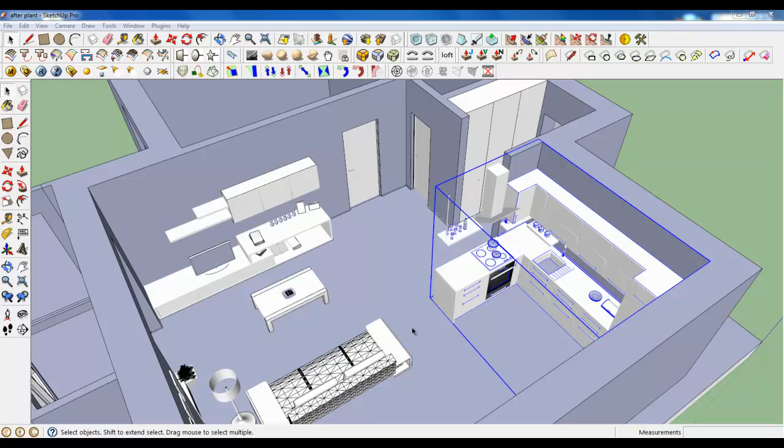Here we are again, and it's time to model furniture and accessories in the dining room zone. But before that, I've made some copies of pictures on the wall, also placed them on the unit and rotated it.

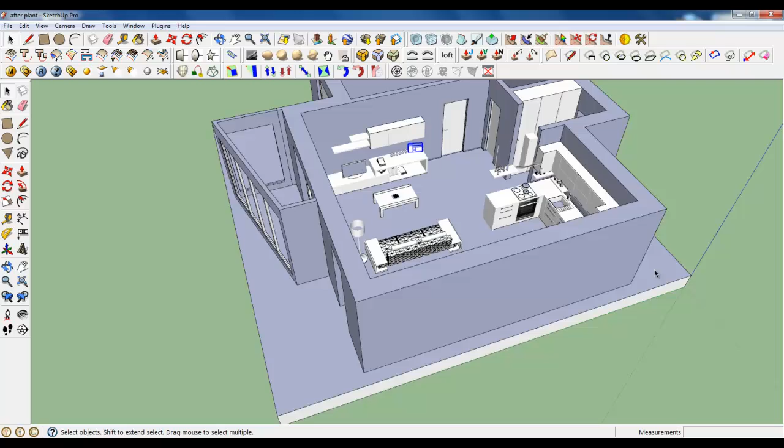Now let's hide the kitchen zone. Also, you can hide the sofa, for example. And I will start with chairs and the table.

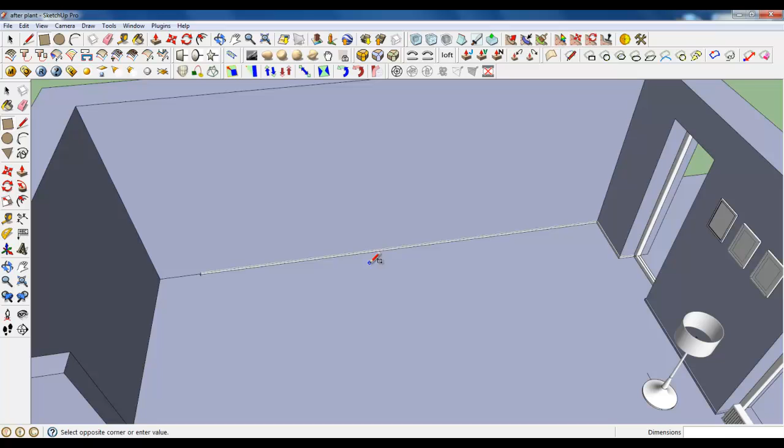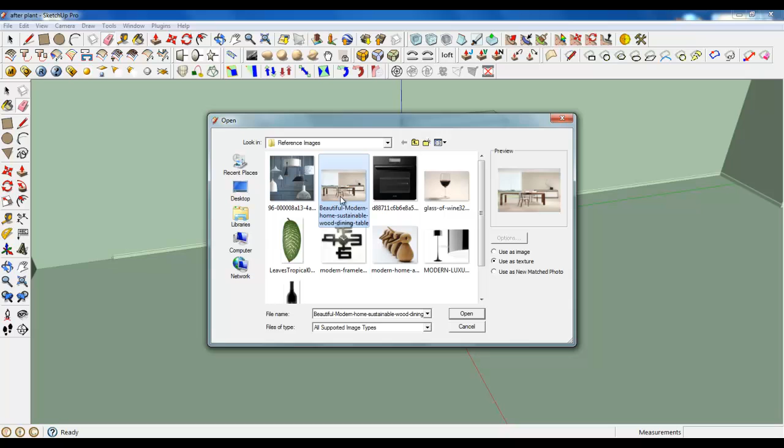I have a reference image for the chair, so let's make a simple plane. Now we can import a picture, reference images, and this image. Let's upload it and make a position.

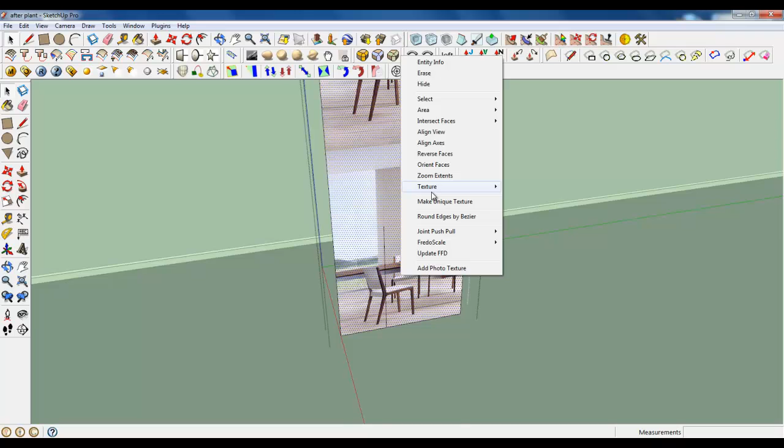Now we need our chair to be 450, so let's draw a line, 450, and scale our picture.

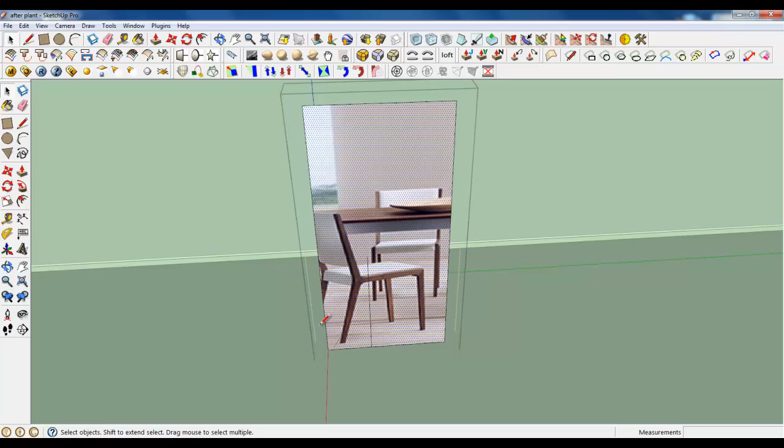It's not good enough. It's something about, but we will scale it after we are done with the base. Okay, so let's draw some lines. The perspective is not perfect in this image, but we will fix it.

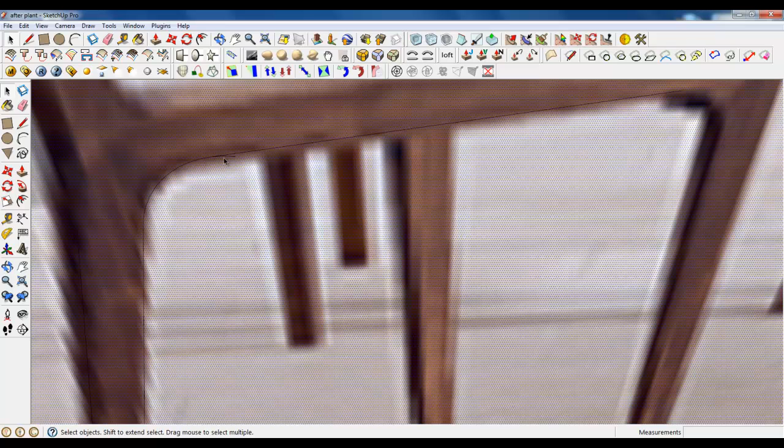Well, draw some lines. It's easy. We need to connect them only. Make sure the height is not different.

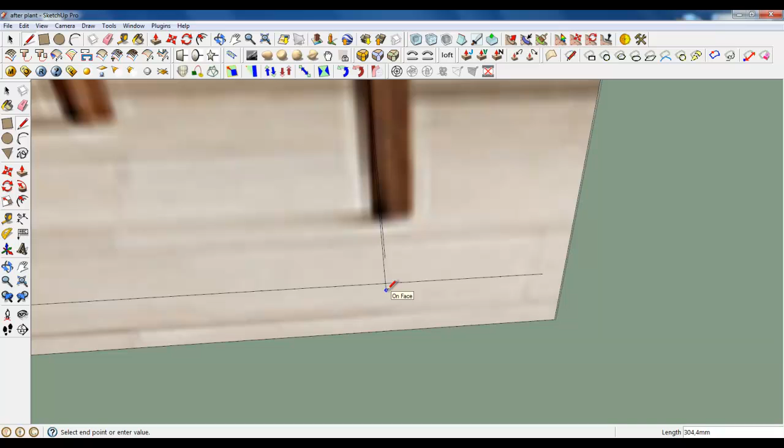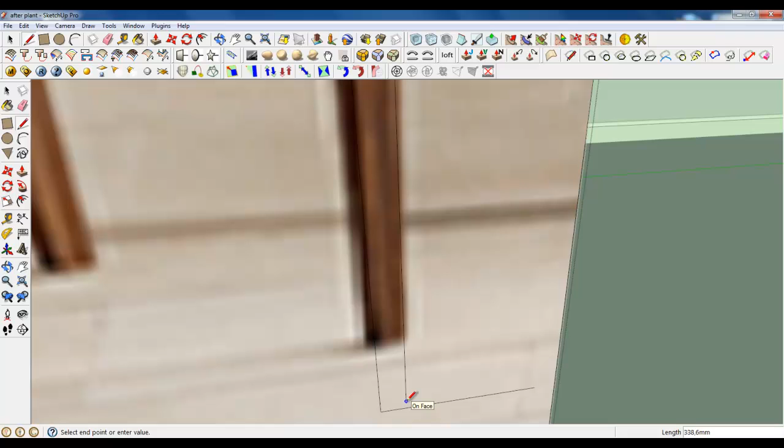Continue line. Well, it's not good now. Continue line and delete these faces. Okay, very good, we are doing it well. Maybe it takes some time, but time is needed. Okay.

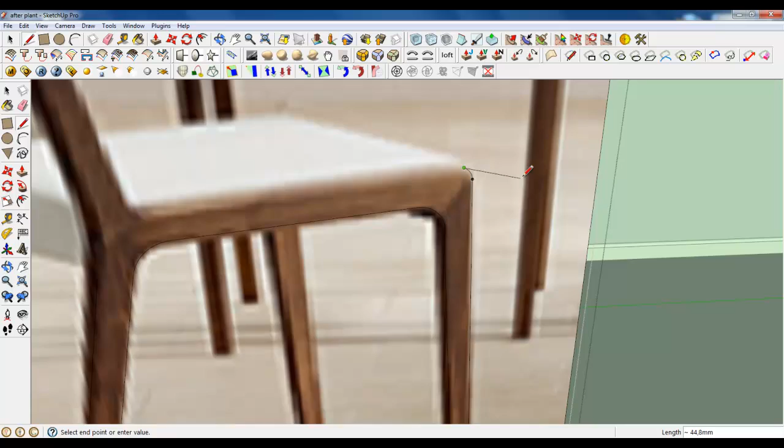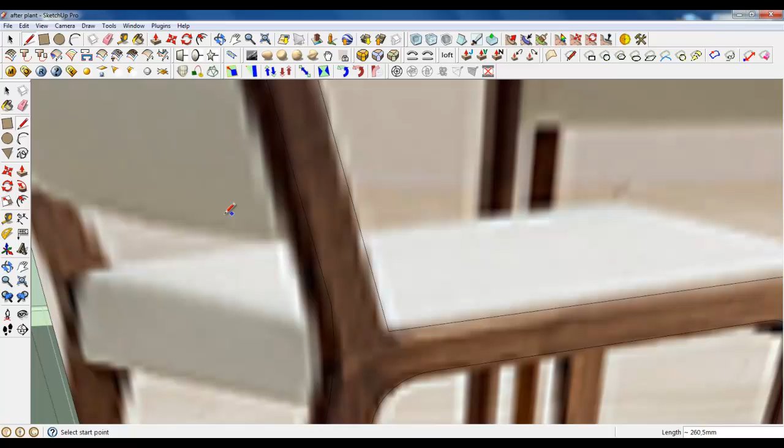Draw an arc. Make sure the arc is on the plane. Make a smaller one. One more line and one more arc. And continue the lines. It's good now, we have a separate plane.

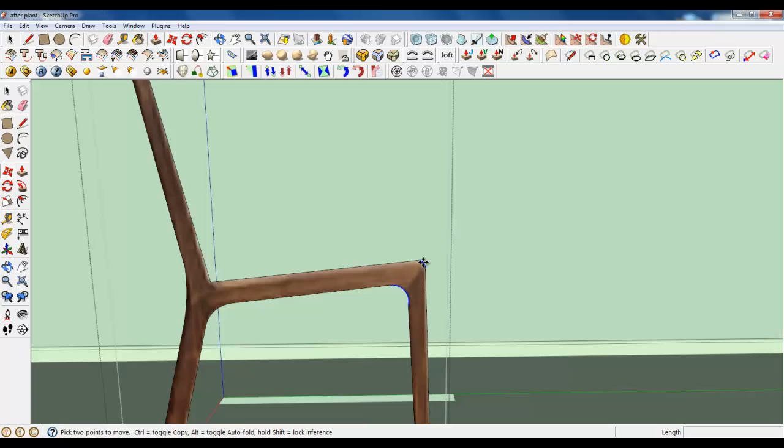So delete these lines, and now you see that the picture is not good, so grab this arc and this, and make them look like this. Close the group,

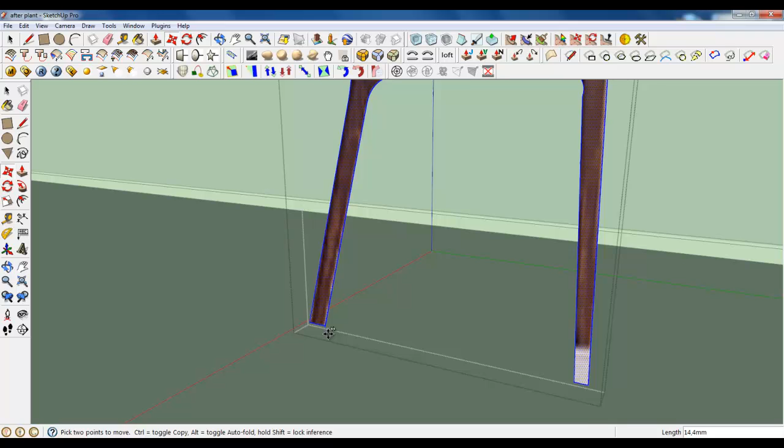Place it on the floor. If it doesn't, open and place it on the floor. All the legs should be in the same position on the floor.

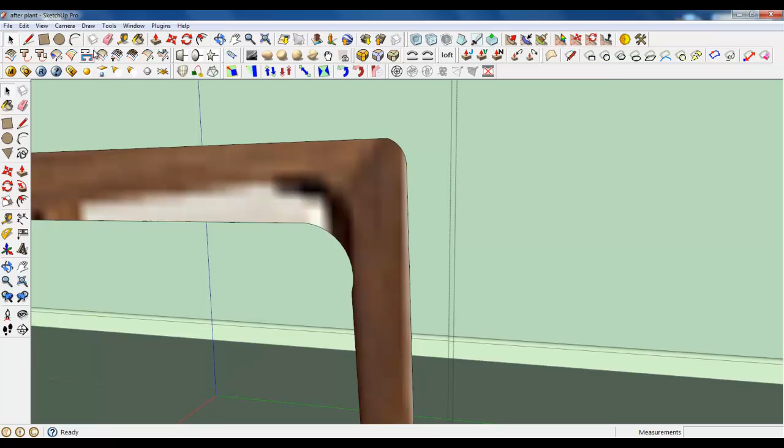Okay, so let's fix this arc. It will be easy. Yep, very good. And now extrude.

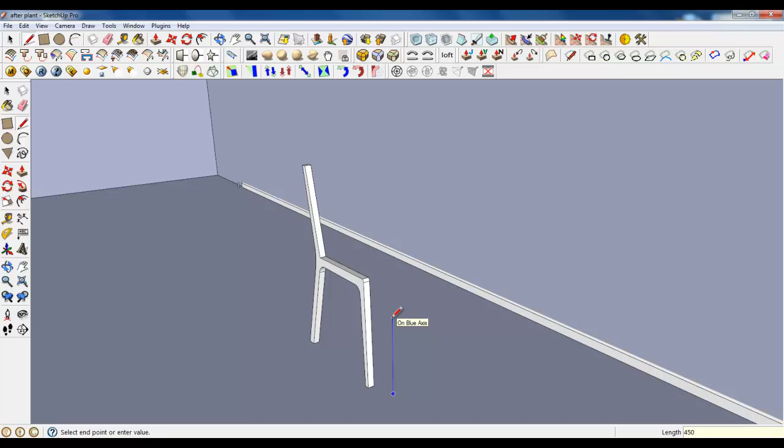Tell Sketchup 20 millimeters. And now draw another line and type in 450, to enlarge our chair. It's good now.

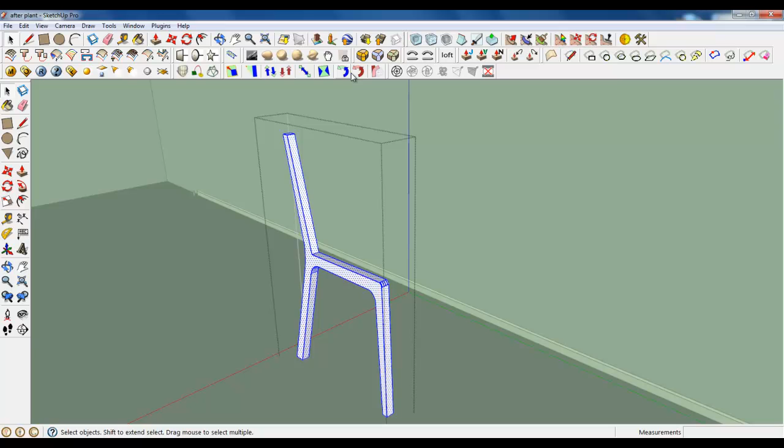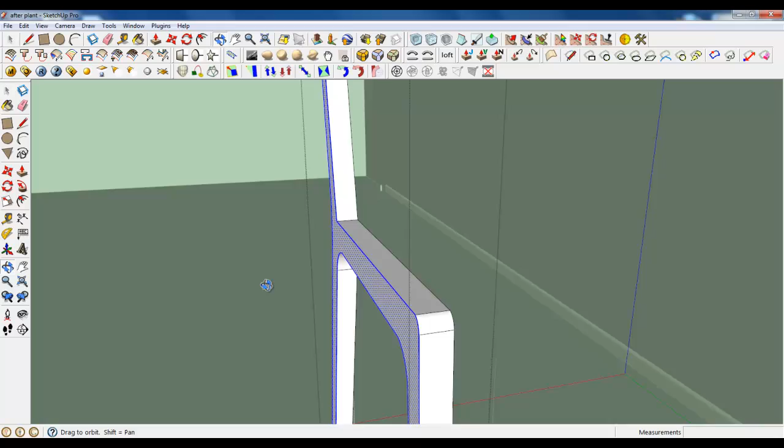Let's select everything and round all the corners. It will take a while, so add only 1 millimeter and 3 segments. Well, maybe let's select this side and this. It's good now, and press calculate. You see it's 709 edges.

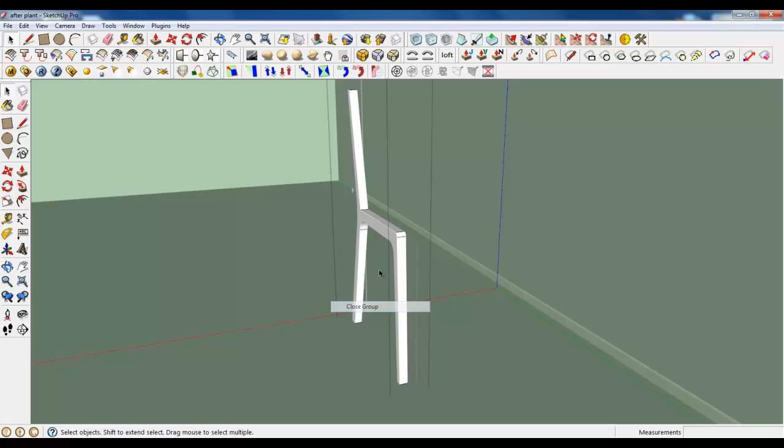I will wait, and then we will copy this leg. Yes, it's good. Now let's copy and set to 400. Very good.

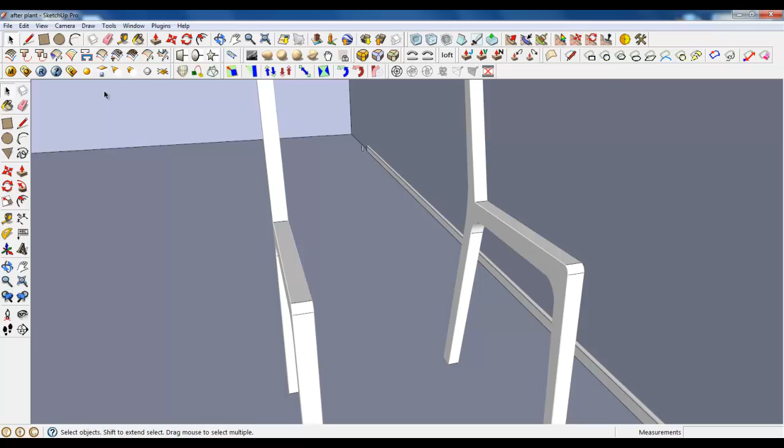Now we need a place to sit, so let's create a, firstly let's make it a component, and call it, chair, and open it. Now create a simple rectangle.

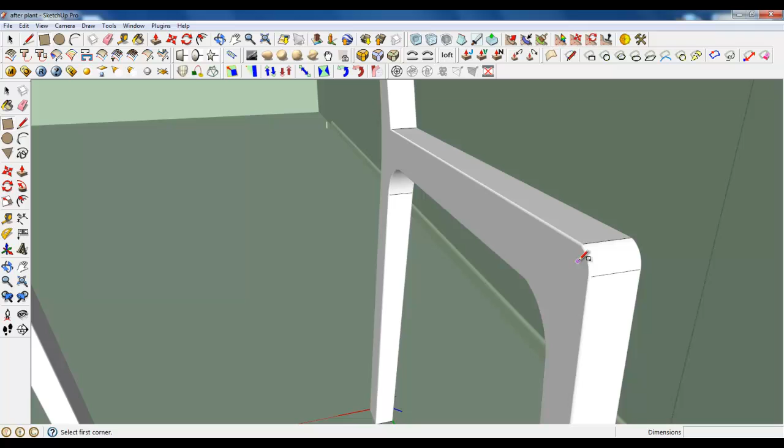We are going to extrude it. Maybe let's adjust. Good, and extrude.

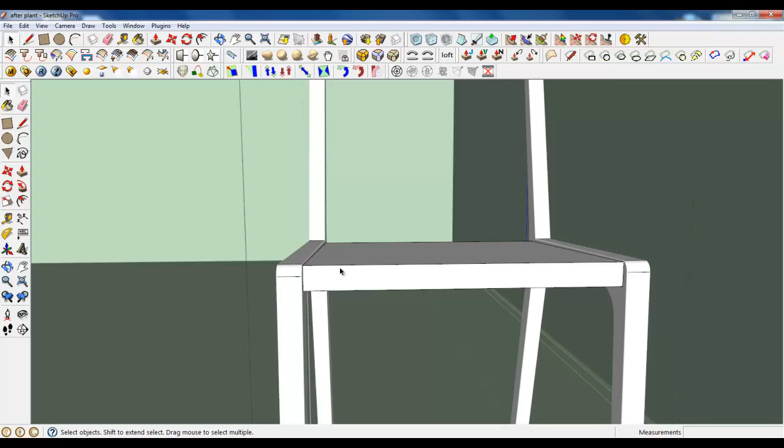Let's cut it with a rectangle tool, drawing rectangles, simple rectangles. Well, it's not good, so

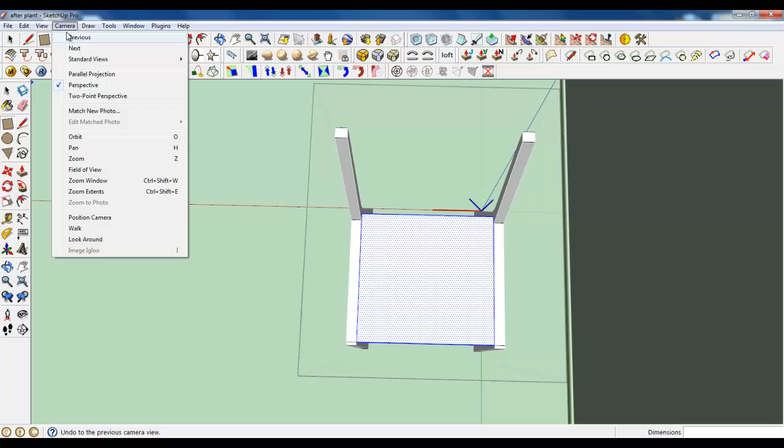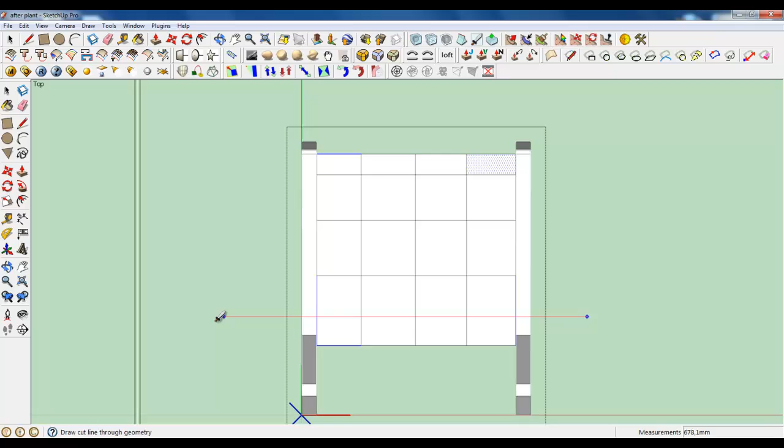Go to the parallel projection mode and top, using knife we can cut this plane, because we are going to use a subdivide tool, subdivide and smooth. It's good now.

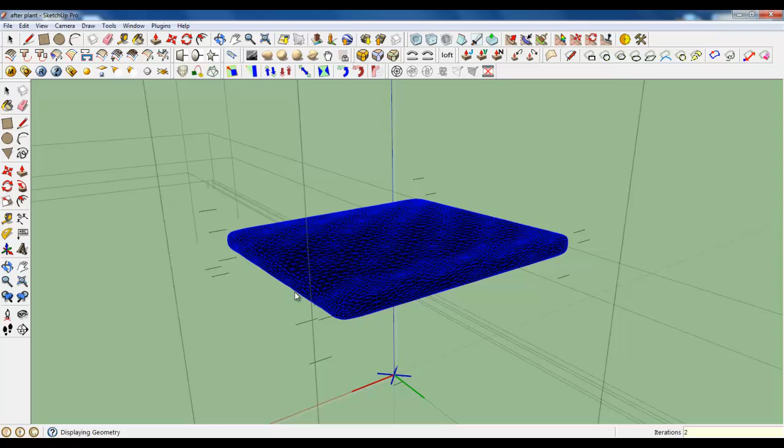Go back to the perspective view, select everything, subdivide and smooth. Type in 2 iterations, press enter. The geometry is being displayed and it's finished.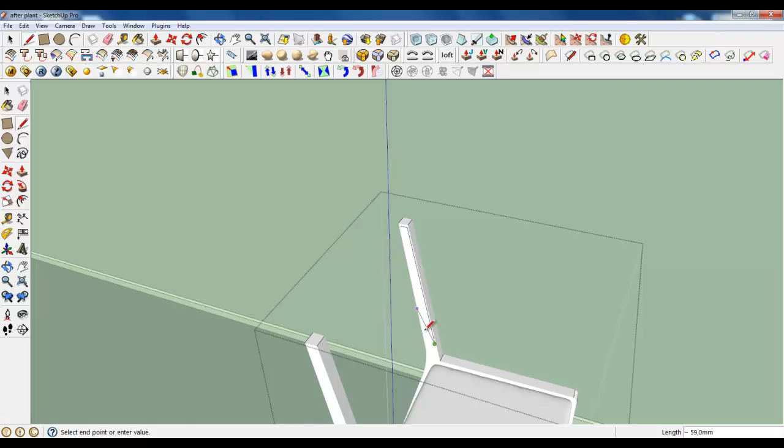We can go to the back one. Create a rectangle with the line tool. Maybe it's not a rectangle, it's a figure.

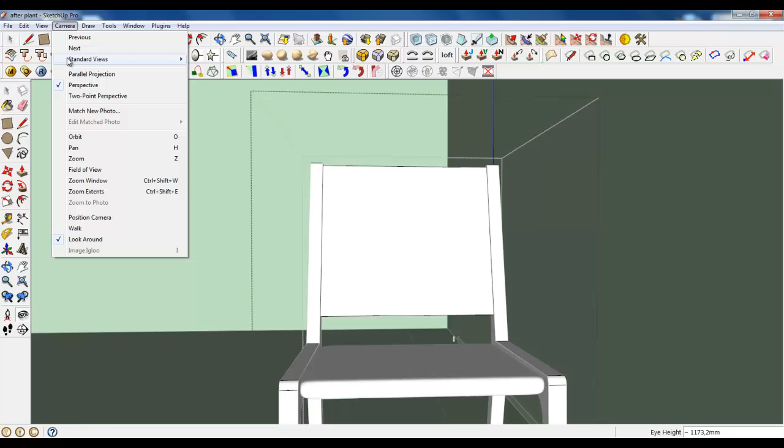Let's extrude and go to the perspective view. Not perspective, turn off perspective and go to this view, and also make some cuts.

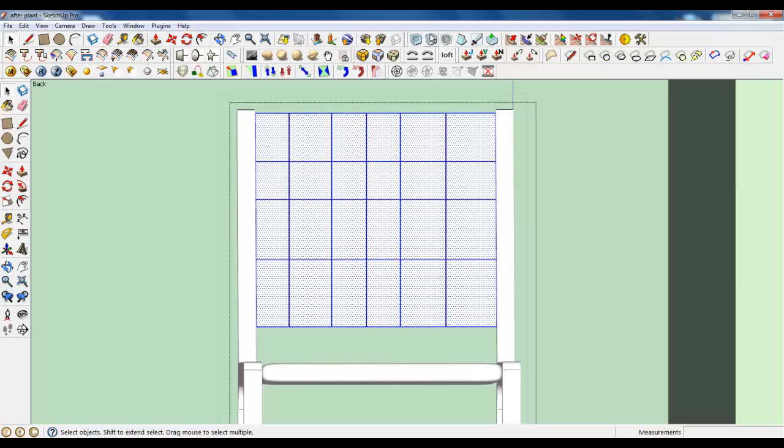It's enough. Select everything, subdivide, and also subdivide and smooth. Type in 2 and enter. Enter again. The geometry is being displayed also again, and we have already made a chair.

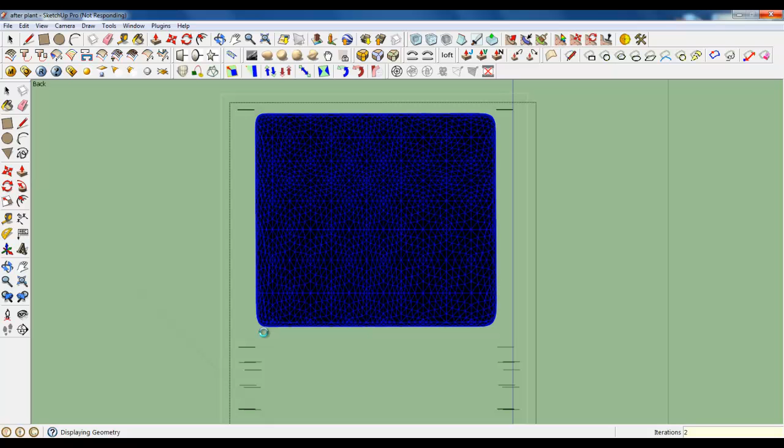We will have to copy maybe 4 of them, and now we will make a table. Yes, the chair is done. Back to the perspective view, and let's create a table.

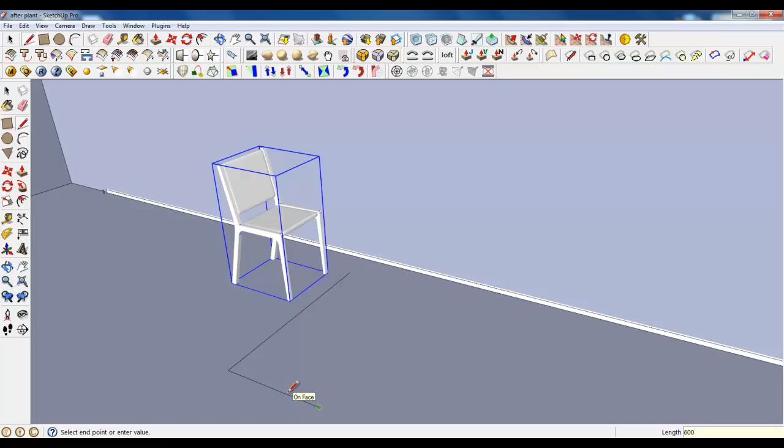Okay, so type in 1200, then 600, and close the rectangle, make a group and extrude it to 720.

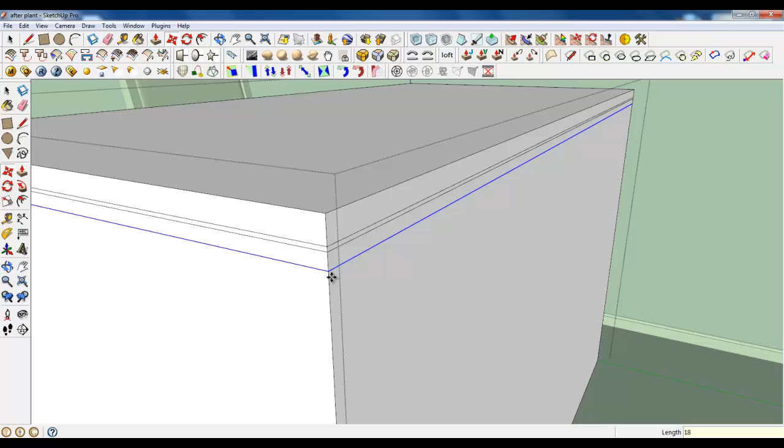Copy these lines to 18, to 3 millimeters, and also 80. Sorry, I need 80. Something about it. Well, Sketchup application starts lagging now because we have many segments.

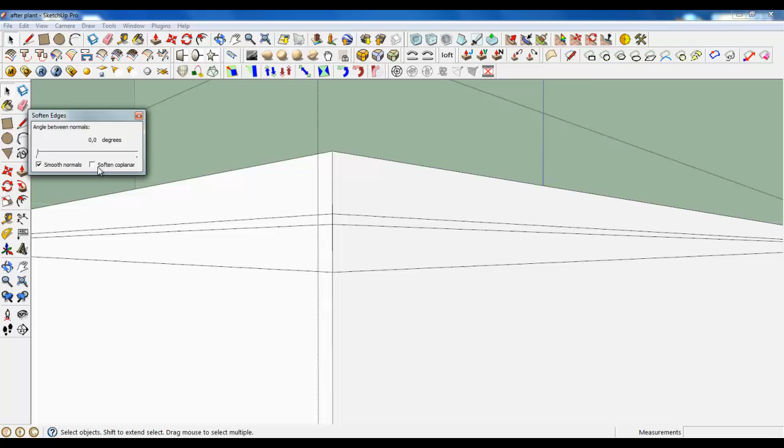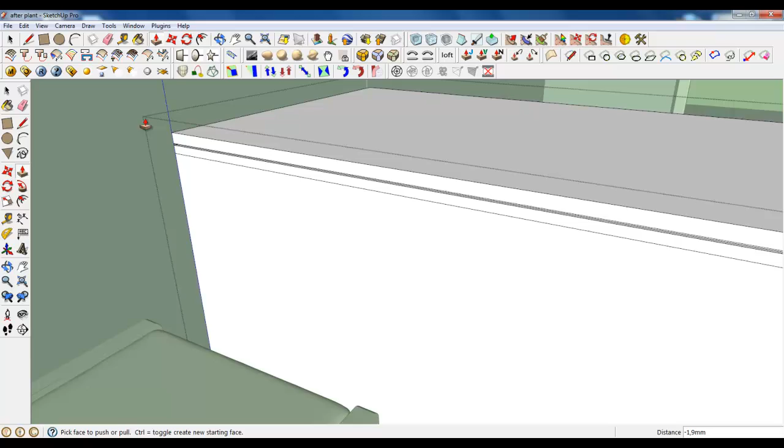Okay, push these edges. After we're done, we need to add legs. So remove this rectangle and create legs.

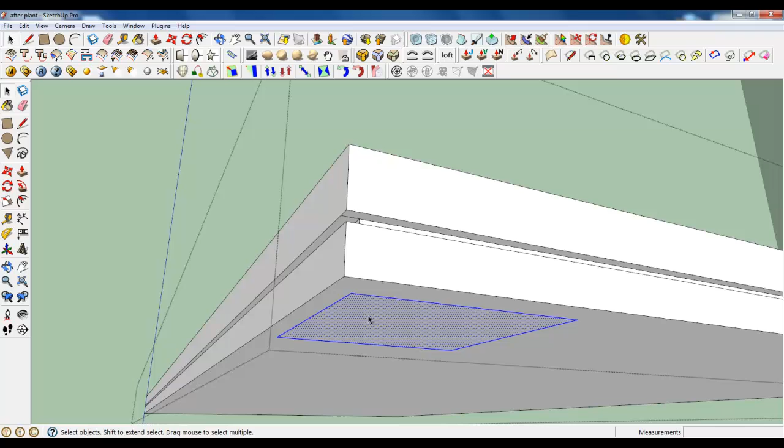Let's choose, for example, 18, 80, closing rectangle, making a group and extruding it. It's too big, so let's make it smaller. Push by 13 and by 13 again.

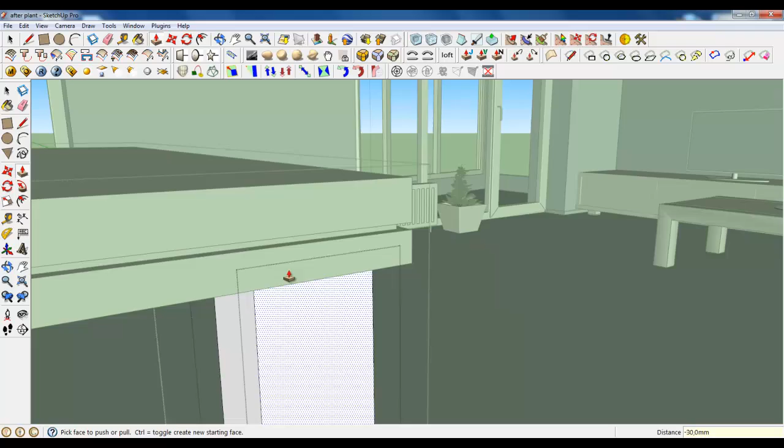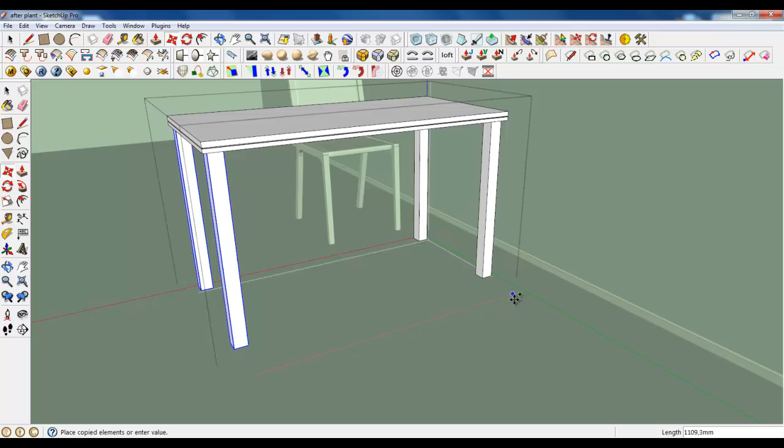It's good now. We can make a component and copy 3 ones. One leg, and let's select 2 to make it faster. Let's create a rectangle to make supports for the table.

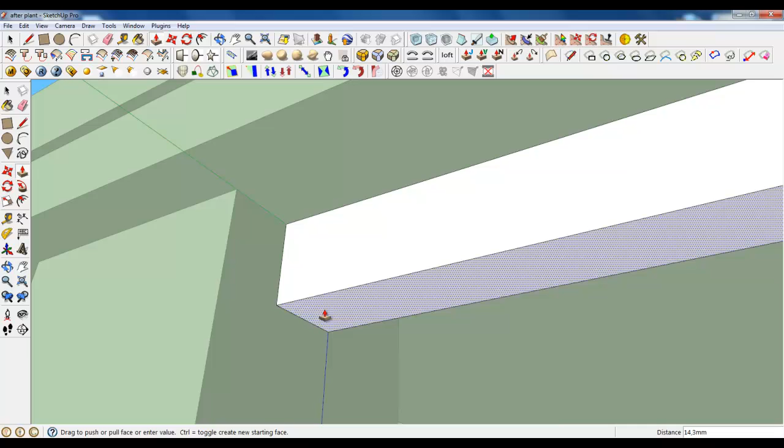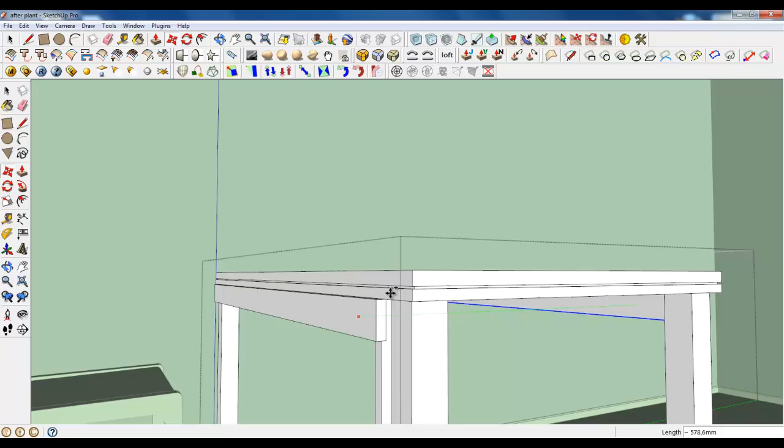Make a group and extrude it. Type in 50. Let's copy it to another side. Place in good position. Now use rotate to copy it and rotate in 90 degrees

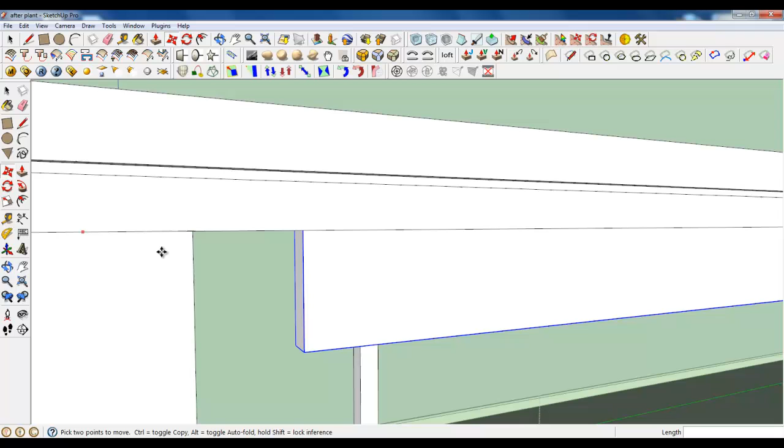using the move tool and scale tool. We will make it fit. Perfect. And now scale tool, grab the center point and use your mouse on this plane.

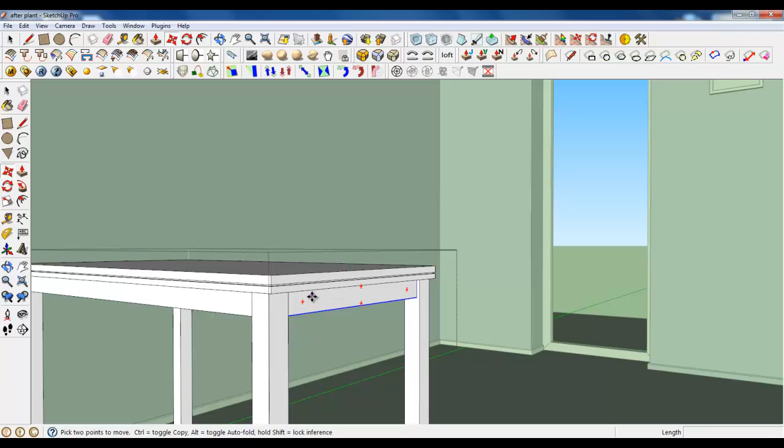Let's copy. Sorry about this. Copy this board, and here we are. We have a table. Maybe let's make a little addition to the legs, and we are left only to add details.

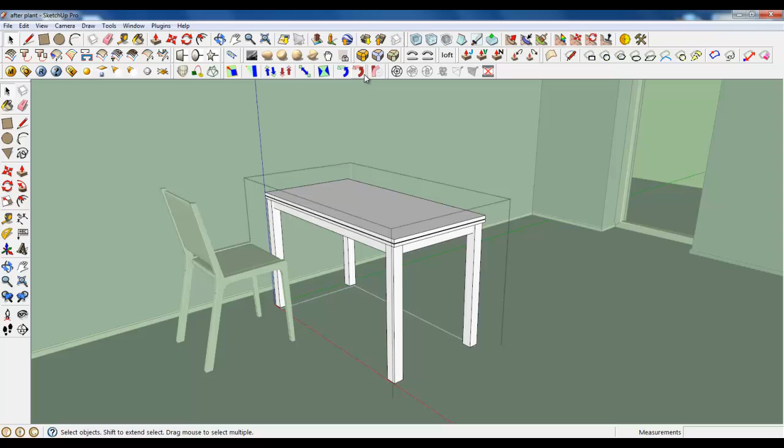The round corners in 3D. So select the top, 1 millimeter, click OK. Also make the same to the legs and these boards, and the table will be finished.